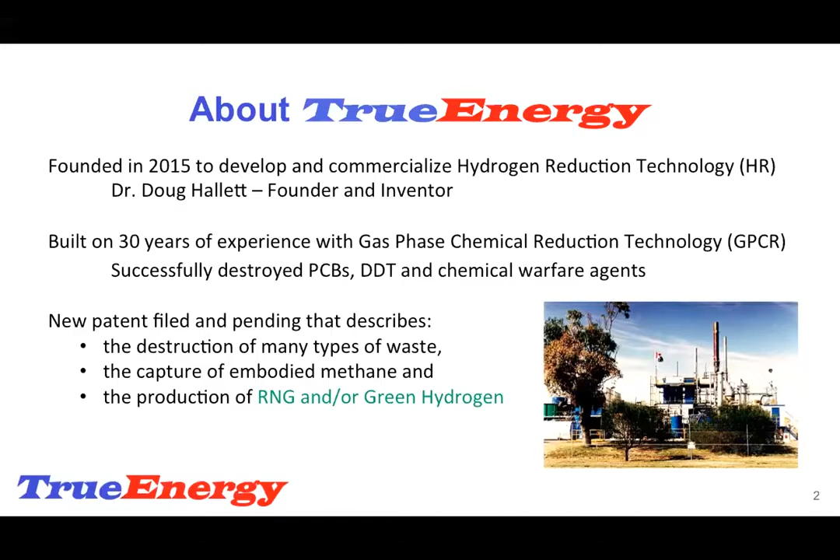If I leave one message with you, it's that this is not new technology. This is proven technology that Doug Hallett, who founded True Energy in 2015, developed to destroy PCBs, DDT, chemical warfare agents in the past. But we've now refined the patent. It's now filed and pending, and it better describes the way and the types of waste that can be processed. It describes the way the embodied methane in the waste comes out, and that you can produce RNG and green hydrogen from it. It is essentially a chemical process.

Waste is being reduced by a reducing agent, which is hydrogen, the smallest molecule in nature, of course. And the hydrogen tears apart a waste molecule into its elemental compounds. We can convert almost any organic waste material from solid waste from municipalities, auto shredder residue, sewage, and this allows us to release the embodied methane in these molecules. The methane can then be purified to a pipeline grade quality, and we can steam reform that methane to create hydrogen for zero carbon industrial, transportation and heating fuels. We also know that we can reduce the molecules. It will release the ferrous, the aluminum, the other metals that can go on and be recycled.

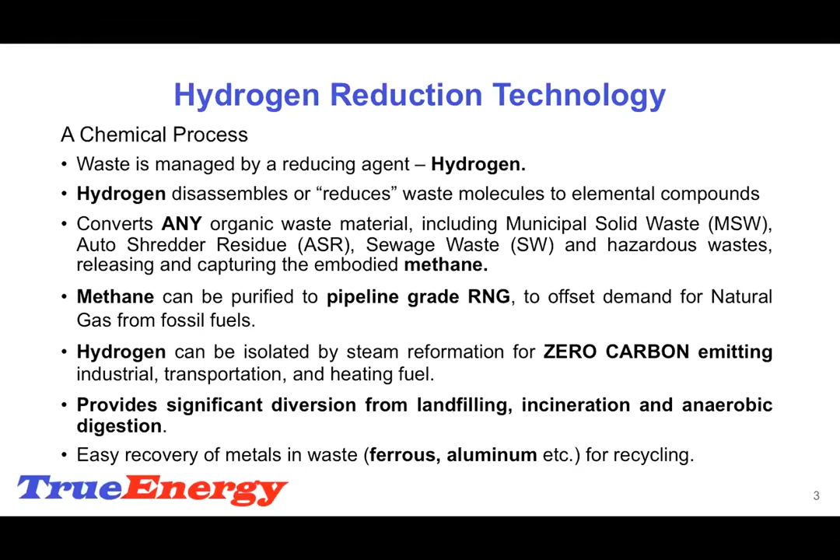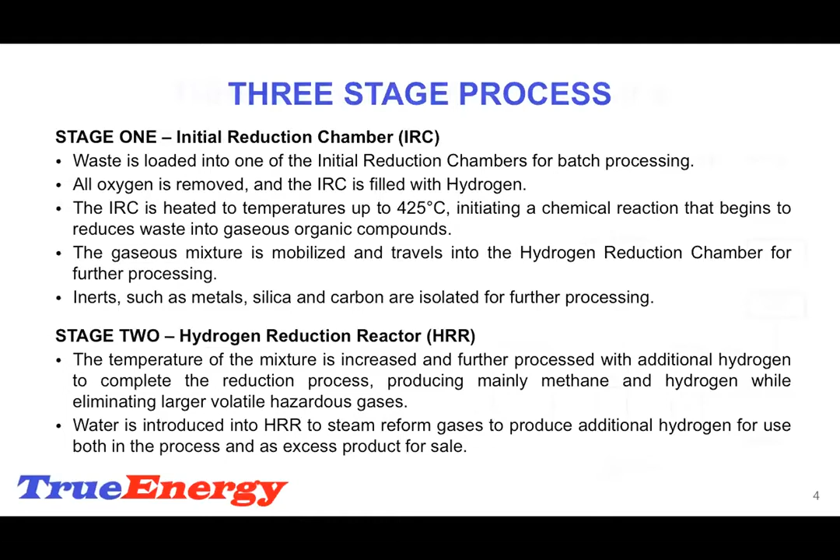It's a three-stage process in which, in the first stage, essentially a kiln, the solid waste enters, you remove the oxygen, you heat to 425, you fill with hydrogen, and it starts a chemical process that opens up the molecule and releases a gaseous mixture. That mixture then moves into stage two, where it is further reduced to purify it into mostly methane and hydrogen. In the third stage, we use typical quenchers and scrubbers to give us a pure stream of methane, renewable natural gas, as well as green hydrogen for sale.

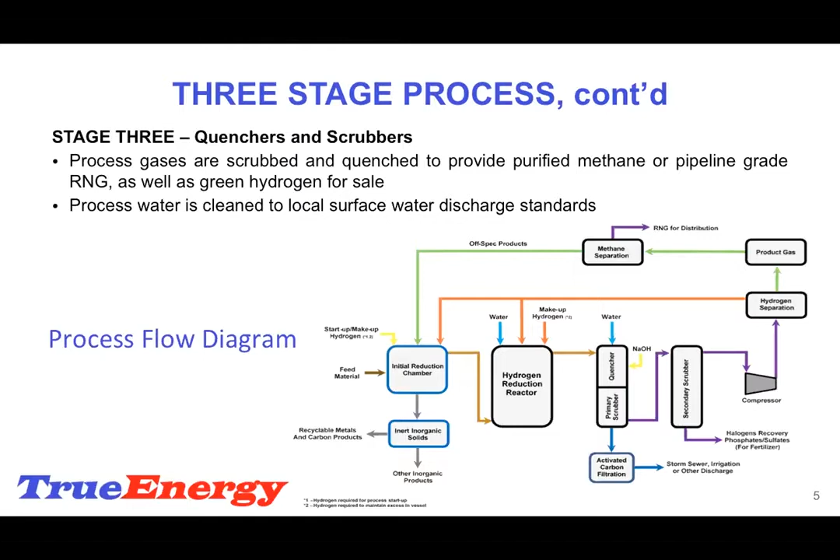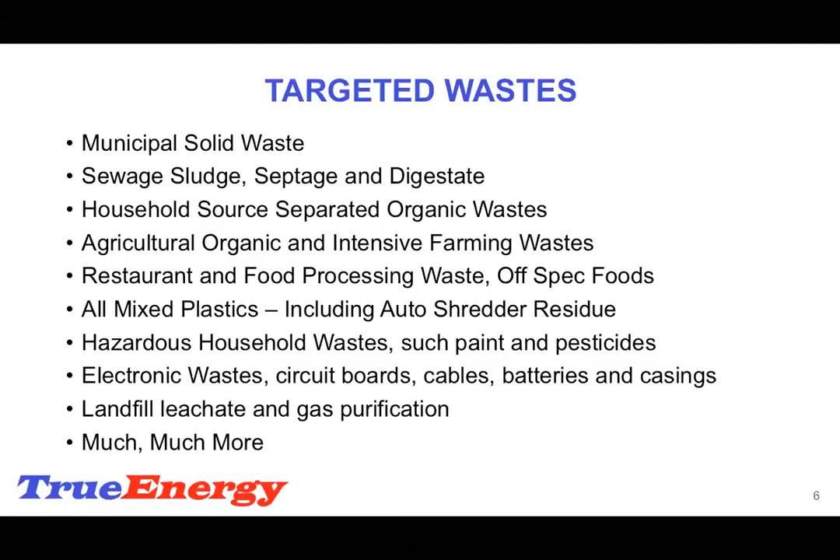These are a sample of some of the waste that can be targeted. Source separated organics, electronic waste, which is a problem, auto shredder residue, and mixed plastics, which can't be recycled. These are all wastes which do very well in our system. We produce renewable natural gas. We can produce tons of renewable hydrogen. We capture all the carbon monoxide and dioxide. So there are no toxic emissions from the process. Everything is captured and utilized in a productive way, including the metals, the carbon, the silica.

The big value proposition here, which distinguishes this from previous technology that Dr. Doug Hallett used, is a single plant designed for 50 bone-dry tons of waste, and that's about 30,000 tons of municipal waste, and consider the city of Toronto manages over 600,000. We need 20 plants for the city of Toronto alone. Auto shredder residue, about 22,000 tons a year a plant can process. And we know that every 15,000 bone dry tons of auto shredder residue will make about 600,000 gigajoules of methane. And each gigajoule, steam reformed, produces about 9 kilograms of hydrogen. So we know we can make in a single unit module about 5,400 tons of hydrogen per plant.

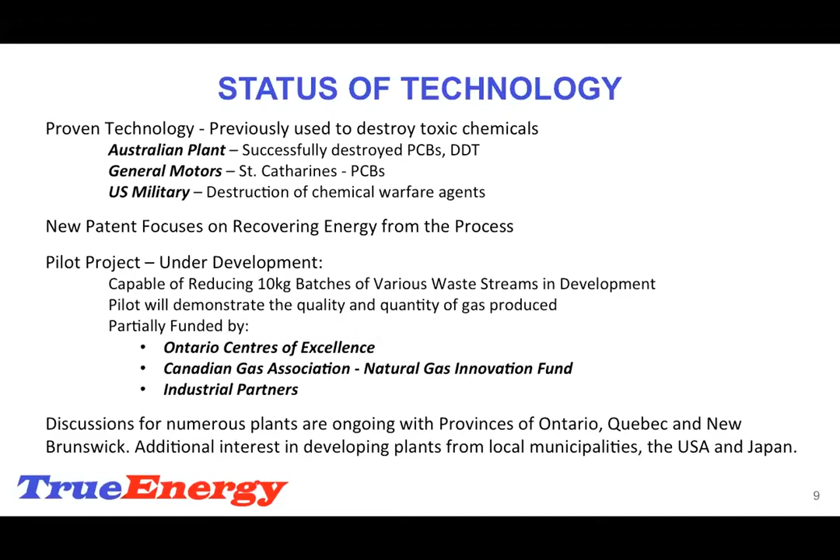So this is proven technology. It operated successfully in Australia, General Motors in Ontario, and the US military had a number of plants going where they got rid of chemical weapons. And the new patent focused particularly on recovering energy from the process. The pilot project we have now is under development. It's about 10 kilogram batches, with which we can use different waste streams to show the quality and the quantity of gas that is produced. It's been partially funded from the agencies you see here. And we have tremendous interest in the provinces of Ontario, Quebec, and New Brunswick, and other local municipalities, the US and Japan. So I think this is a proven technology that is very profitable. And this is a picture of our plant that was in Kwinana, Australia.

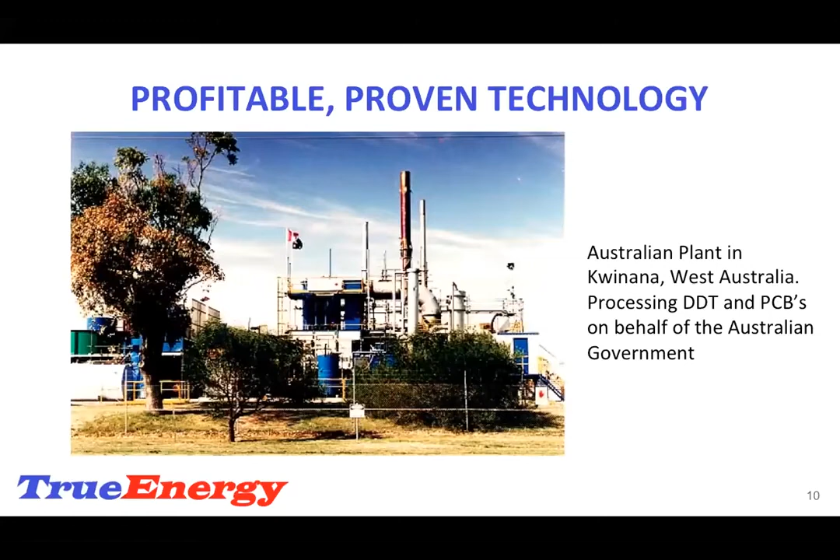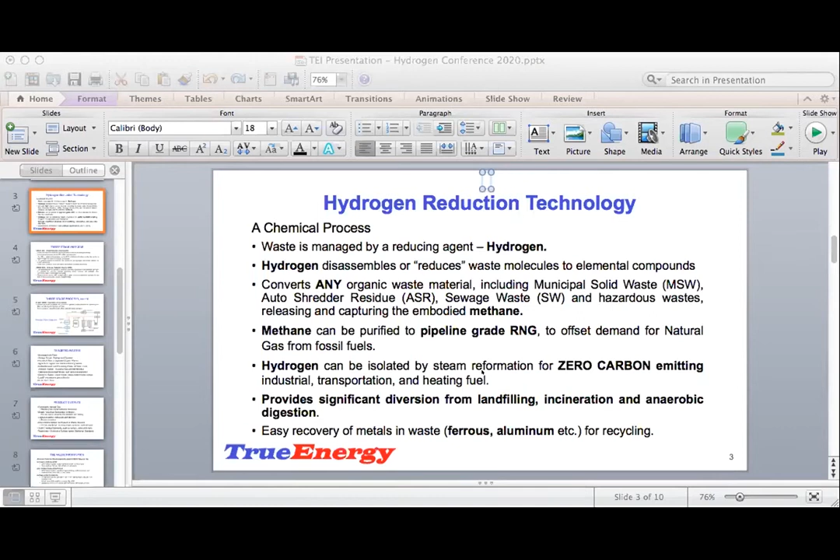Now, would you classify that as thermal technology? And how does it compare to pyrolysis, plasma arc, or gasification? Well, it's a good question. It's very different in that it's a chemical process. You don't have the presence of oxygen; there's no oxidation of the waste. You're not converting waste into a new product. You're basically disassembling a molecule into its elemental compounds. You don't have the issues you'd have in gasification with tarring. And you don't have to have a very homogeneous waste stream. All the different waste, the mixed residual waste from municipalities, are all quite suitable for this technology.

Okay, very interesting. Hydrogen is characterized by different colors, green, blue, brown, describing its sustainability. What grade of hydrogen does the HR produce? Well, it all depends on where your source of the waste is coming from. Biogenic waste, source separated organics, most of the municipal solid waste is coming from biogenic sources. So it would be treated green, just as you would from an anaerobic digester. The portion that is non-biogenic, we would call a recovered natural gas more than a renewable natural gas. But it's interesting in the steam reformation process, one molecule of methane steam reformed, 50% of the new hydrogen coming into the system is from water. It also would be biogenic and then green.

So we are almost entirely green, and it is a new source of hydrogen, which I think will be able to reduce the cost of producing hydrogen significantly from the cost associated with electrolysis. Electrolysis is a great technology. It's very important for grid stabilization, but we'll be able to make lots of hydrogen very inexpensively and help drive the hydrogen economy of the future.